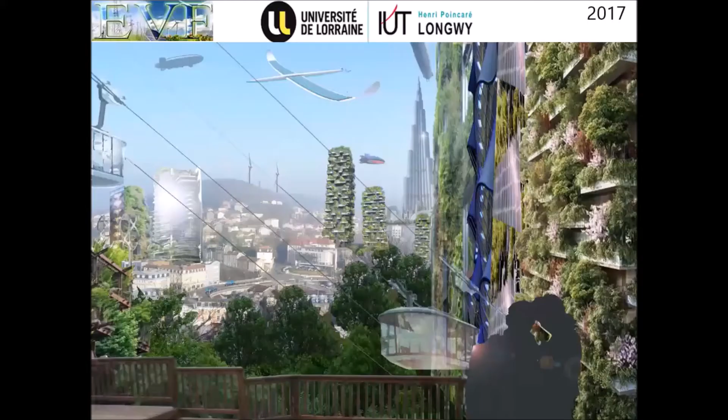Thank you for them. Then the symposium became the place to be for dreaming about the 2050 city, starting in Cergy, followed by Queens, followed by the north of Morocco in Martil, with the scientific basis of the conference being built in the French language.

Without imagination, future can't find any support to materialize human progress. As sketched on the slide, the city of Longwy, a very small city in the north of France, at the frontier between Belgium, Luxembourg, and France, imagined 2050 and worked two days of the EVF symposium in 2017.

Without a memory, future doesn't make any sense. This is a picture of our EVF in Fez, Morocco, a city 1,200 years old. The conference served here as a bridge to connect past and future, history and future.

Then we went to the city of Pune in India, close to Mumbai. This city with more than 3.5 million inhabitants gave some maturity to our event, because it traveled from the Francophone area to the Anglophone area, to a big country with huge questions on energy, materials, and cities. Here the edition reached an international dimension with full English presentations and papers published in E3S proceedings.

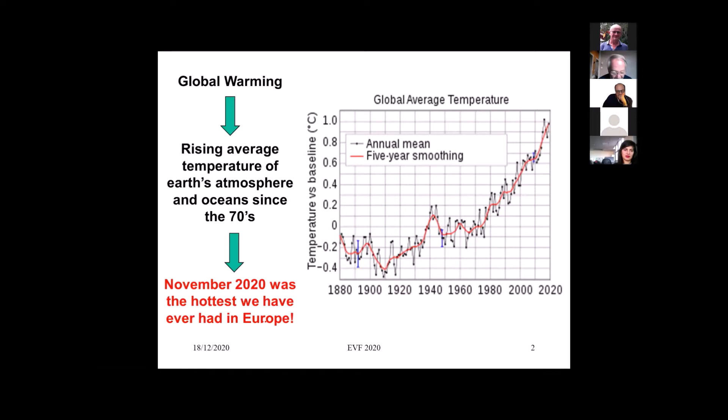For example, this month of November, I don't know about Canada, but in Europe it was the hottest November we have ever had. It's a problem. And when you are trying to understand... oh sorry, it's too sensitive, no sorry, I come back.

The reason why we have this increasing temperature is mainly due to the increasing concentration of greenhouse gases, mainly CO2 and CH4, produced by human and cattle activities. We must not forget cattle activities. Also, for sure, burning of fossil fuel, agriculture, and deforestation. Deforestation is very important, mainly this year with the enormous forest fires we have had in Australia, California, and Siberia.

There is another very big problem with permafrost thawing. It will represent about 50% of fossil fuel CO2 increasing from combustion. When we look at direct CO2 measurements, we see a fast increase, and last year a very, very fast increase. It's a very big problem.

I was talking about permafrost thawing in Siberia. Normally the landscape is very flat, with only some lakes. But in northern Siberia this year in summer, we have had this kind of flakes appearing. It's warming, defrosting, with evolution of CO2 and methane, and it's a very big problem.

They have had a problem in Norilsk, which is a city with a big nickel industry, and the facilities are sinking because of this permafrost thawing.

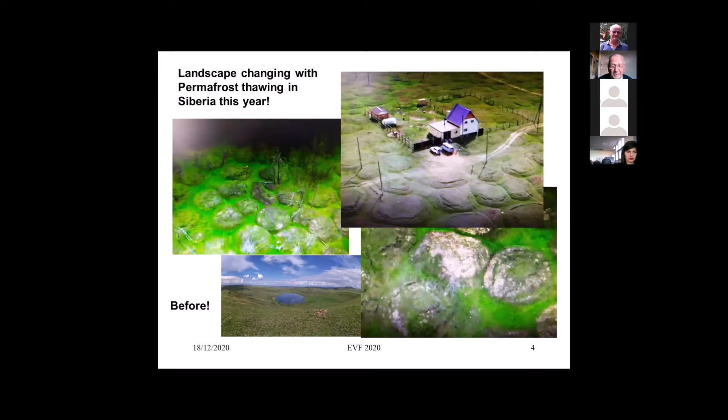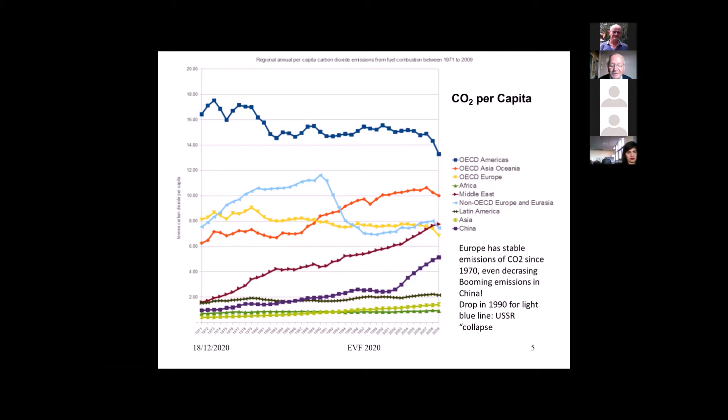They are trying to make efforts with reforestation, for example. They are the first in the world for reforestation, but it's not enough. After China you have the US, and India, because they have a lot of people.

In Europe, it's mainly Germany. But Germany, because they have stopped their nuclear plants, are replacing them with coal power plants, and it's really a very big problem.

Quite the same in the UK. In the UK, they also have a lot of coal power plants, but actually they are replacing them with pellet, wood pellet power plants.

And Russia - they are not making a lot of efforts. Fortunately their industry is not very well developed currently, but nevertheless they need to make a great effort.

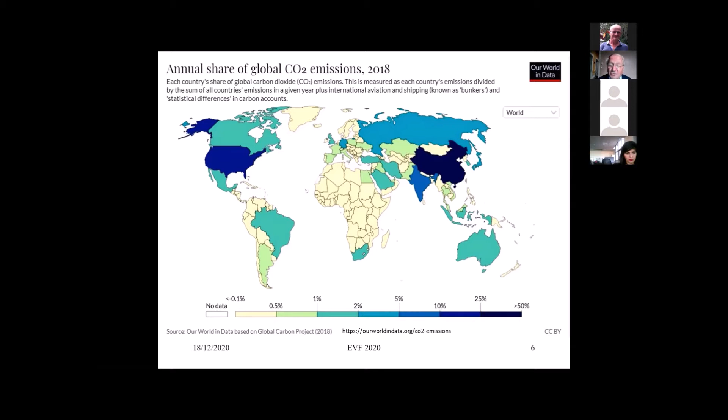It's necessary to reduce these greenhouse gases, and the main strategy to reduce these GH gases is to trap carbon, to have carbon sequestration. We have different ways of carbon sequestration.

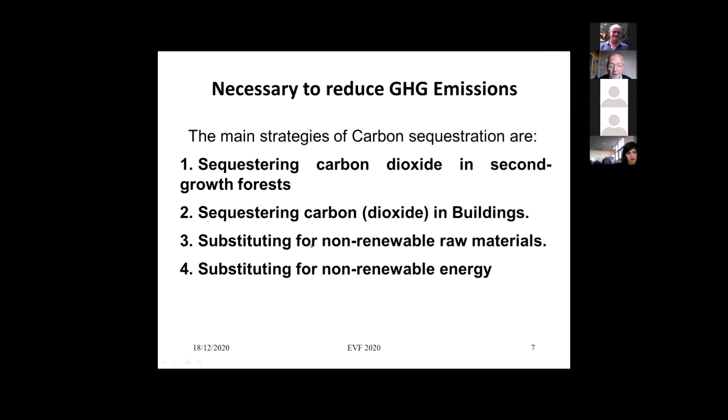We can have CO2 sequestration in forest, but only in second growth forest, not primary forest. We can store carbon in wood products, mainly in buildings, and we can replace carbon-intensive, non-renewable raw materials with materials that do not consume too much carbon in manufacturing.

Just to talk about natural forests, old growth or primary forest - it's very nice to have these forests, but it's only good for biodiversity. You have a natural carbon balance, and in fact it's useless to fight against global warming unless you log and replant new forest, because there is an equilibrium between carbon sequestration by photosynthesis and carbon release by respiration and decomposition.

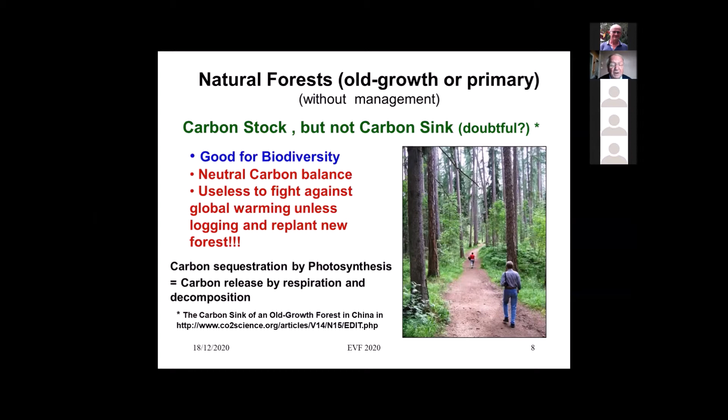Another remark - when we talk about forest, we are talking about vegetation, but we are forgetting the carbon stocked in the soil.

When you look at agriculture, for example agricultural land, you have only soil - vegetation is very small, in fact.

In boreal forest, the trees are not very high, like in Arctic forests in Canada or northern Russia, but we have a lot of carbon in the soil. This explains the very bad influence of global warming on permafrost.

In temperate forest in Europe, for example, we have an equilibrium - it's not a lot. Tropical forests are interesting for vegetation - you have large vegetation and also a lot of carbon in the soil.

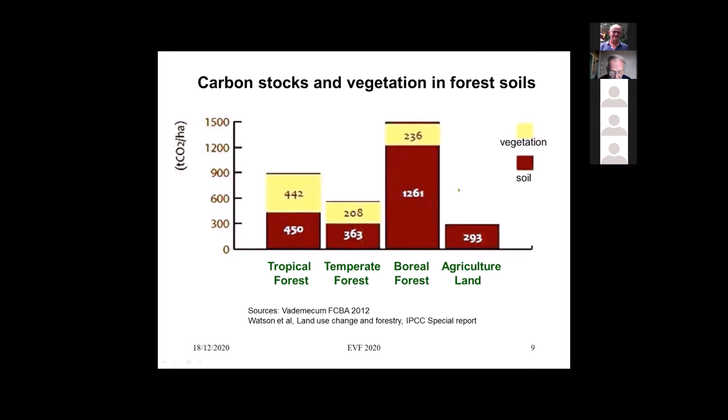Secondary forest is a forest we're interested in managing for carbon sequestration. You have carbon stock and carbon sink. Carbon stock is the carbon inside the forest, and carbon sink is the carbon which is stored. It's a dynamic process with formation of trees or even agriculture. To have good action in this forest, you need to harvest mature trees, and in that case you avoid end-of-life decomposition and CO2 release. It's a source of wood, an important material, and also forest products, mainly for construction.

These forests are planted or naturally regenerated. We can clear cut these forests, but after clear cut we need to replant immediately. To have good evolution, the harvested volume must be a bit less than biological production. In temperate forest, when managed and harvested, we trap about 3 tons of carbon per hectare per year. For boreal forest it's a bit less, about 2. The best is tropical forests, where managed and harvested forests trap about 5 tons of carbon per hectare per year, except in desert.

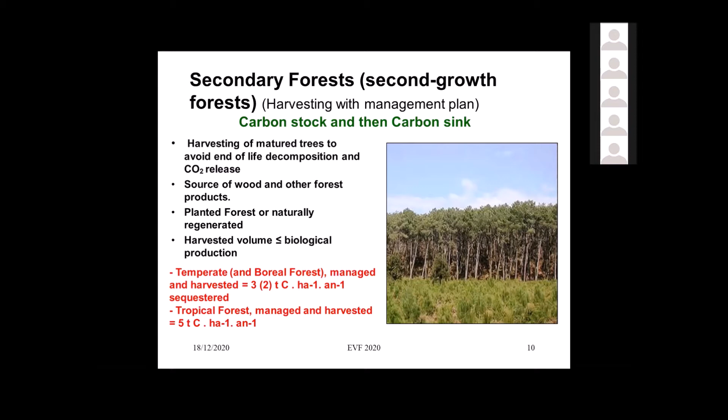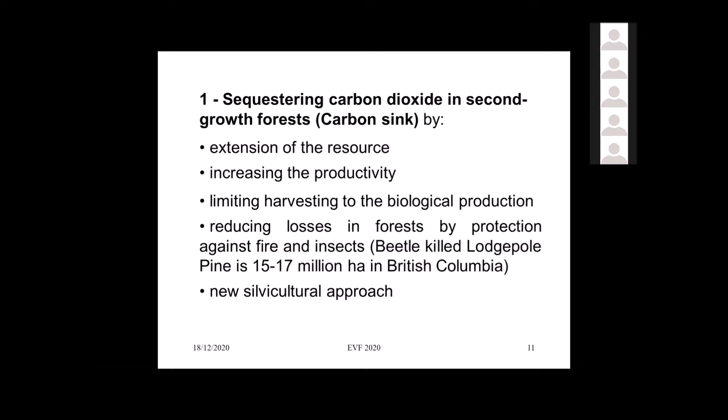In secondary forest, it's possible to increase this process by extension of the resource, planting more trees.

I am a fellow at the Academy of Agriculture of France, and one time we had a discussion with colleagues. One was proposing to make the Sahara green again, but the main problem with the Sahara is the lack of water. So he thought it might be possible to build nuclear power plants on the coast of the Sahara for desalinization of water. Or perhaps it could be possible to use solar cells, solar heaters instead — there was somebody in Morocco planning to do that.

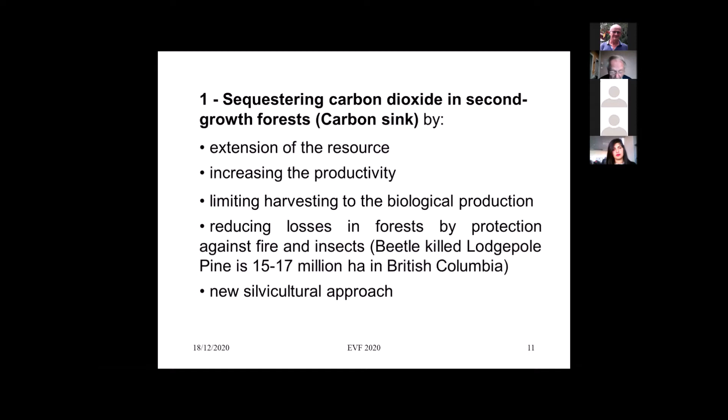In this forest we need to limit harvesting to the biological production — I repeat, that's very important. But the big problem for this forest is loss. We have very big losses with forest fire, as I've already mentioned, and with insects. For example, even in France, in the northeast, we have a very big problem with spruce and beetles, and the worst case was in British Columbia, where about 15 to 17 million hectares are dying and being converted into wood pellets. We probably need a new silvicultural approach.

Forest products are mainly for building with wood — different wood products, sawn wood, engineered wood products. That's the main part, and it's developing very fast. Also boards, furniture, paper, until end of life, and we try to keep them for as long as possible. To maintain this process well, we need to increase the durability of wood with wood protection.

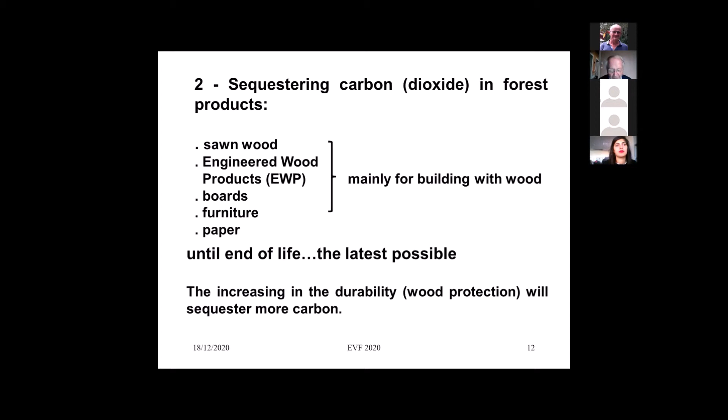When talking about building, the situation is really relatively dramatic. Looking at the effect of buildings on the environment, it's been a problem for many years.

60% of global resources are consumed by buildings. 50% of waste production is from buildings, and 35% of global energy consumption is from buildings. 35% of CO2 emissions related to global energy consumption come from buildings. These figures are very new — they were given at the beginning of December in a Congress in Germany.

So we need to do something. Regarding legislation — I told you there's a lot of waste production with buildings — there is now legislation for a new law about waste hierarchy according to circular economy law. It's coming step by step, but first we need to reduce waste, then reuse it, if not possible recycle it, and at least energetic recovery when possible, and finally landfill. Different countries are trying to sharply reduce landfills.

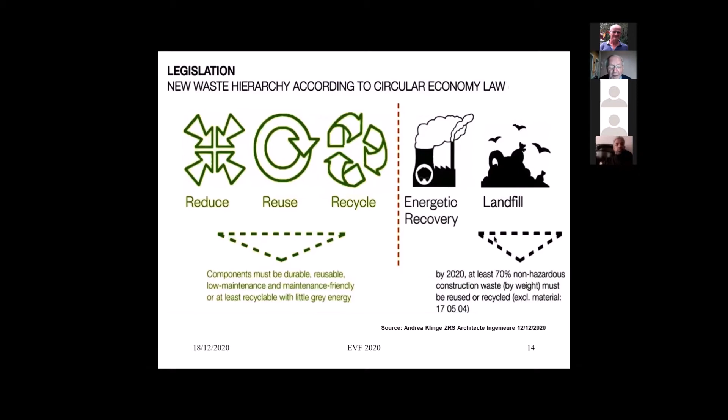What are the benefits of building with wood?

We have had large development since about 10 years and more of engineered wood products. We call it massive wood. We have CLT, cross-laminated timber.

It's a new development which is coming from Austria, from Graz University. The professor who developed this CLT has had this year the Wallenberg Prize. We call it the Nobel Prize for the forest and wood sector, which is given by the King of Sweden.

You have glue lams since a longer time, and laminated veneer lumber. These wood products, the manufacturing of them uses much less energy than other building materials, and so in that case you have less greenhouse gases.

You have, for wood products, a lower carbon footprint. The manufacture of concrete and steel accounts, when you're looking at global production of greenhouse gases, for 8% - and it's quite a lot.

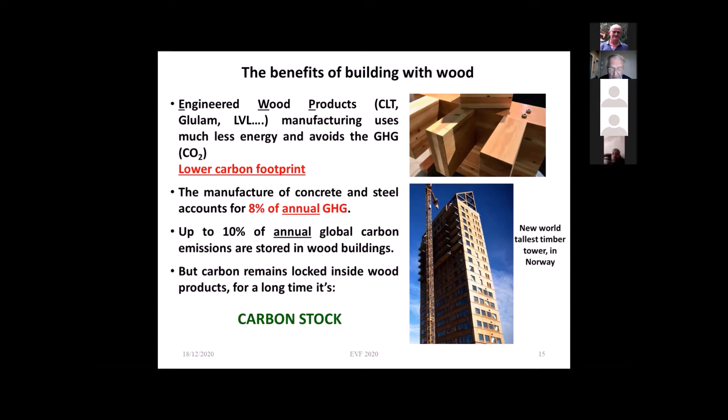This carbon remains locked inside wood products for a long time. It's a carbon stock, and it's important to have this carbon stock. Yeah, the benefits of building with wood.

It's great competition with people from concrete and steel. Timber-based buildings take less time to build with prefabricated mass timber panels and beams. It's possible that eventually one man can build his house himself. Smaller crews assemble the structure more safely and quickly, saving time and money.

But the greatest amounts of wood are used not in high-rise buildings. High-rise building is very good for publicity for wood building, but in fact we don't have a lot because there are some drawbacks we'll see later. The greatest amounts are in mid-rise buildings, 4 to 10 stories.

I remember when I was living in Quebec, I was living in a four-story building. It was in the 70s, let's say, and this building was made completely with wood. I came back to visit the place last year, I guess, if I remember. This building still existed, perfectly clean, with a lot of people inside. So the durability is very important.

But with wood construction, we have some drawbacks. The main drawback is combustibility. Here you have the famous building fire in London 4 or 5 years ago. That's a problem for multi-story buildings in comparison to steel.

But in comparison to steel, glass, or concrete, we must know that normally with wood you have combustibility. The combustibility of wood produces char, and char is an insulating product.

It means that when you have a large cross-section piece of wood, the durability during a fire is longer than the durability of steel. With temperature, steel loses its mechanical properties. For wood, you have time to go out normally.

So for this kind of high-rise building, we need to improve the fire resistance. There are different means to improve fire resistance - it's possible with chemical treatments, with fire retardants, for example, or eventually with cladding.

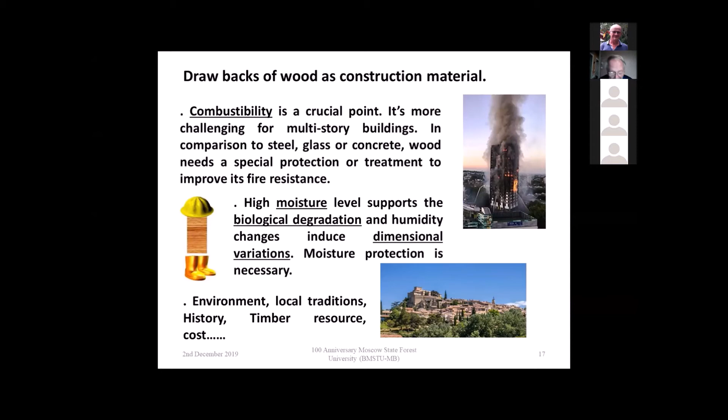I am always a bit too long, so Mohammed, you need to stop me if I am too long. Yeah.

That's a classical example of the carbon stock in a house, in a complete wooden house. We have different quantities of CO2 which are stocked inside. The main part is in the frame and walls.

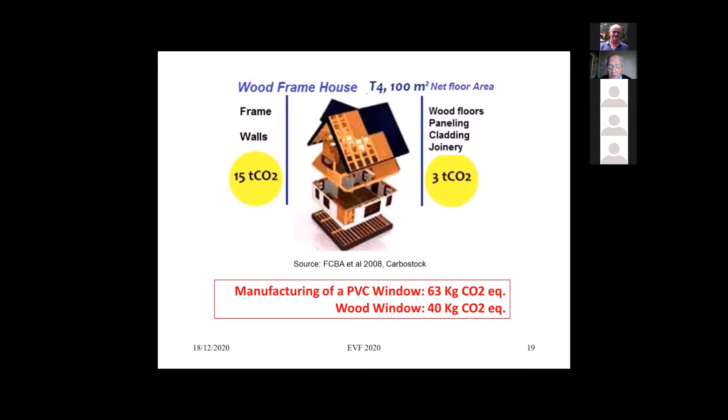To compare, for example, when you look at the manufacturing of a polyvinyl chloride window, the equivalent is 63 kilograms of CO2 equivalent. For a wood window, all included, even glass, you decrease to 40 kilograms of CO2. So you have an advantage to replace plastic windows with wood windows.

Another advantage is that when you have high temperature, the plastic becomes soft. When you have low temperature, the plastic breaks very often because of the low temperature. So wood is the best material to build windows. The only problem is the cost or the price.

Since 5 years, people are trying to develop this cascading, even until the last use, which is energetic recovery. When we don't know what to do with the last waste, you have energetic recovery.

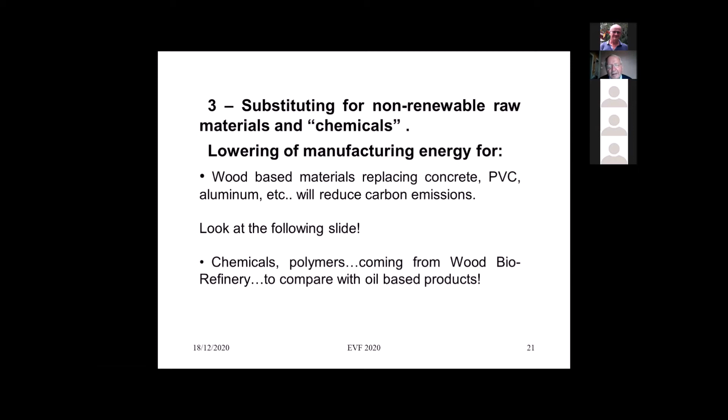Large industry doesn't like this competition with wood. And actually some companies in France like Vinci or Eiffage say that they are producing low carbon concrete, but it's not so low. You have something which is very classical.

I have already shown this figure many times. You have the difference in embodied energy between wood and aluminum, for example. But aluminum is very stable, and very often we are using mixed products, for example, for windows. Myself, I have used a mixed window with aluminum outside and wood inside recently.

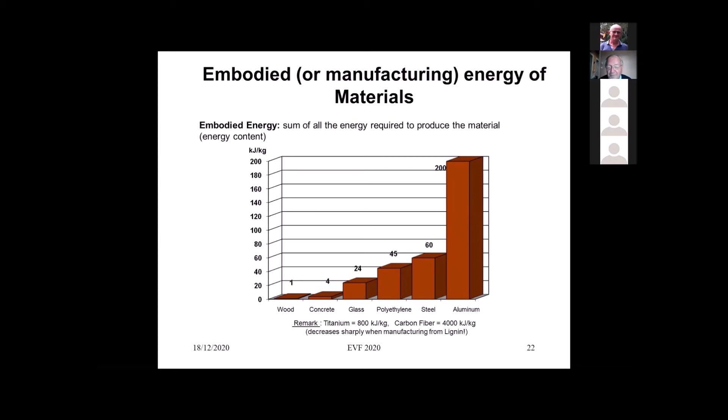For energy, we need to assume carbon neutrality, but sorry, I'm not a good manager of PowerPoint. Actually, if we assume carbon neutrality, we need to be very careful with carbon neutrality.

We must understand that when you burn, you cut a large tree, for example, into pieces, and with these pieces of wood, you put them in a furnace in a central heating plant. 1 ton burns in 15 minutes, and how much time does it need to grow this large tree? Perhaps 1 century. So carbon neutrality is very difficult to assume.

But nevertheless, actually in Europe, wood represents 50% of the renewable energy. It comes from clean wood, from stems, 50%, and 50% residues from harvest operations, end of life products, and industry residues.

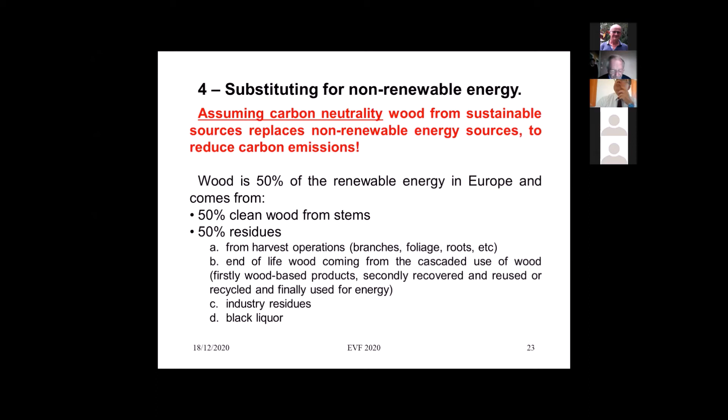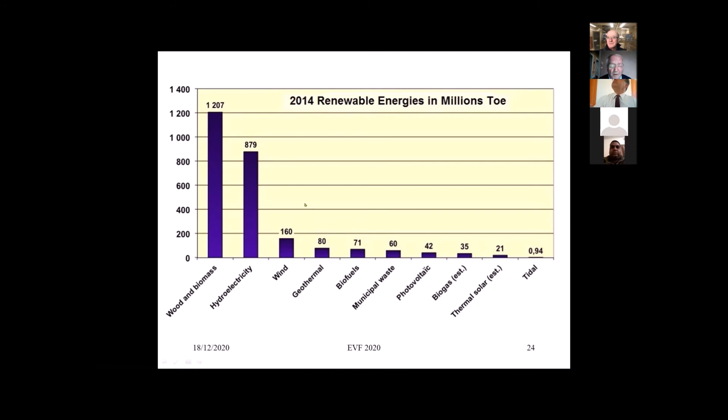And there is an enormous market about these wood pellets. And it's starting in our country, in France, but in Europe, we are the greatest consumers of pellets coming from North America.

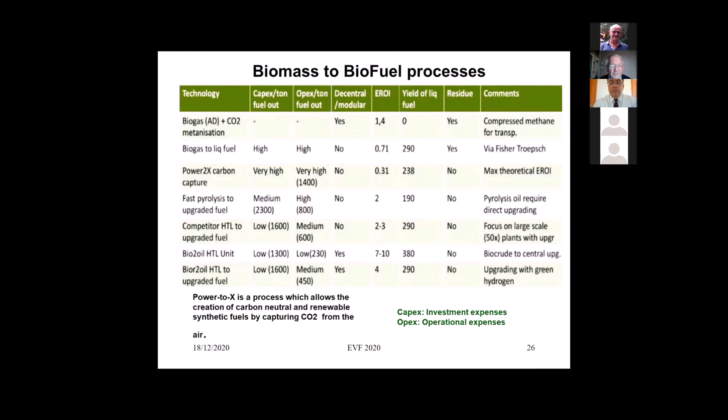I want to show you this process. It's old and new. We started with this process in '85 at the lab, working on wood liquefaction for Elf company - they were interested in the '80s. It was a sleeping process until the beginning of our century, and it has been developed since then as direct hydrothermal liquefaction, a new and old process.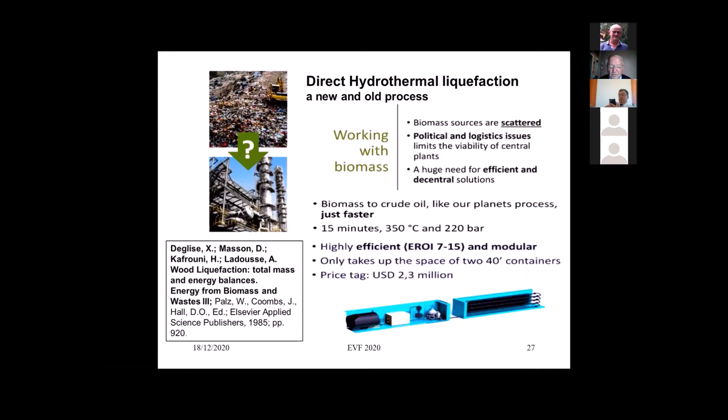The advantage is, as biomass sources are scattered, you can have a lot of small plants producing crude oil. It's a batch process, not continuous, taking 15 minutes at 350 degrees Celsius and 220 bar. Efficient, quite good efficiency, and not very expensive.

So this parameter is very important, we must always think about it. When we were looking at oil coming from Texas in the 1930s, or even from Saudi Arabia, you only have to drill the ground and recover oil. So EROI is very high, 100 at the maximum.

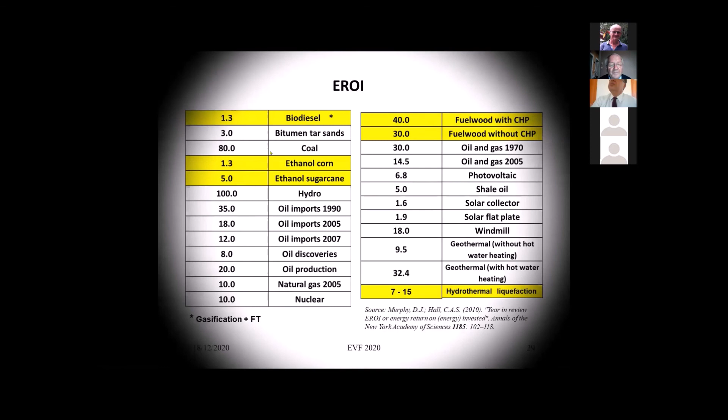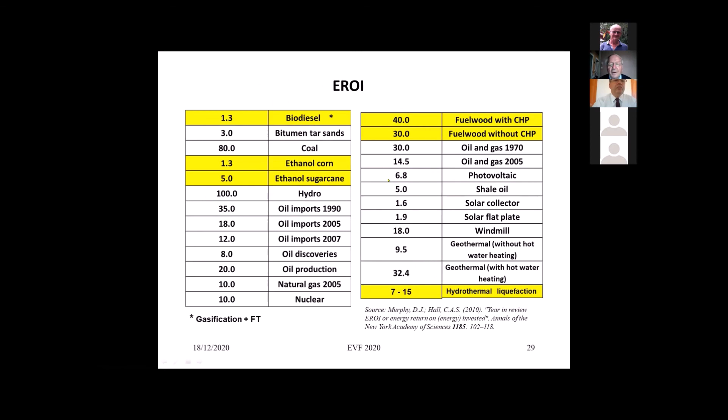Coal is not too bad, and wood is about 30. Wood is about 30, and when we detail, a lot of people...

Oh, I'm really sorry. So I am lost, perhaps it's time to stop. Where is my... excuse me. Maybe Mr. Deglise, can you hear me? Dr. Deglise, can you hear me? We are... that's a very interesting conference, and I have registered.

Biodiesel - people are talking about biodiesel coming from wood gasification and Fischer-Tropsch. It's very complicated, and you need large plants, large facilities.

But when we compare with ethanol, ethanol is not very interesting, because you produce 1.3 kilojoule and use 1 kilojoule. Ethanol from sugar cane from Brazil, for example, is much better. So better use sugar cane to produce ethanol than corn, and wood also - with wood it's not very interesting because we don't have enough cellulose inside for ethanol.